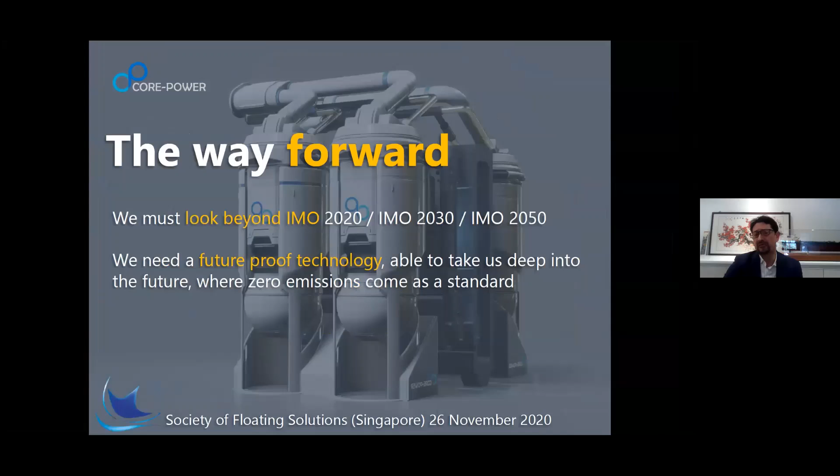Now, the way forward, and not only for shipping, is just to look beyond pure compliance and find future-proof technology that is able to take us deep into the future. Like in shipping, we did a transition from sail to steam, from steam to diesel engines, and now it's time to find a new technology for the centuries to come. A technology where zero emissions or close to zero emissions come as a standard.

Now, in order to understand what technology is best, we need to understand also what is really sustainable. Sustainability is bound to three necessary conditions. In order to be sustainable, we need to be safe, both in standard operation and in accident conditions. We need to be affordable. If a solution is not affordable, we cannot implement it, so it's not feasible. And also very important, a solution needs to be scaled to the size of the problem. Otherwise, it's not relevant to the problem.

The best solution in the world that can solve only a limited part of the problem is not a solution for the problem. And in shipping alone, the size of the challenge is around 350 million tons of heavy fuel oil equivalent that are used every year.

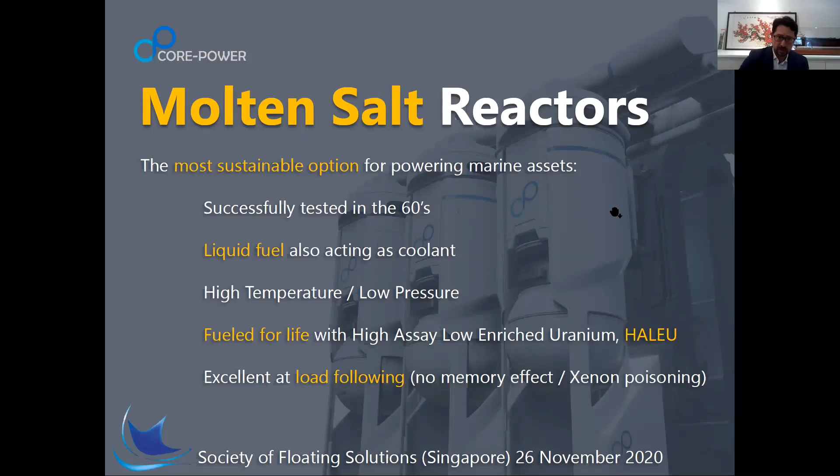Now, how is the scheme of a molten salt reactor power plant? We have a core with the reactor, and we have a drain tank. The drain tank is a passive safety feature, and in case of any issue, since the fuel is liquid, it can be automatically drained in the drain tank, killing the reactivity and killing criticality.

Then we have an intermediate loop that takes the heat from the reactor and transfers the heat to a power conversion system. In our case, the power conversion system is a supercritical CO2 closed cycle Brayton cycle. And then of course we have a cooling system, which is very important because when we operate a ship's diesel engine plant, most of the heat is rejected to the atmosphere through exhaust gases. In a closed system like this, we don't have exhaust, and in order to reject the heat, we need a much more powerful cooling system.

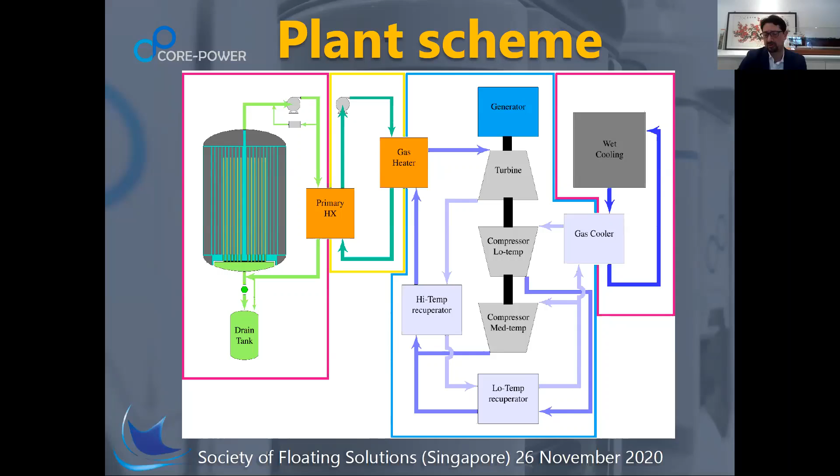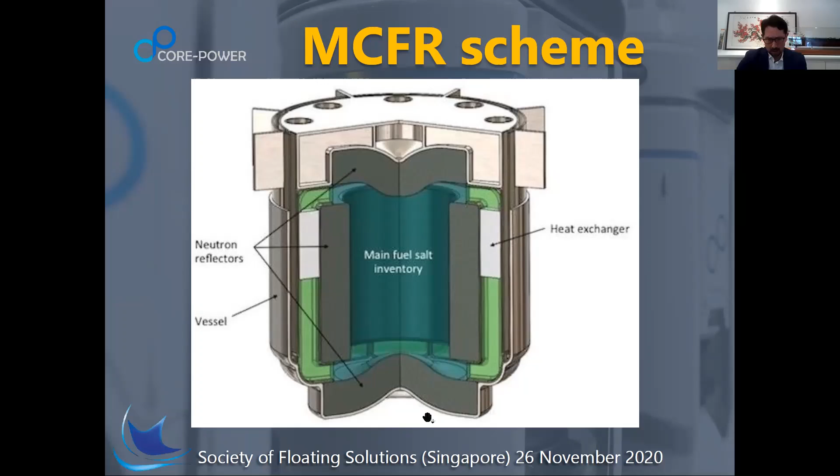If we look at the power conversion system, it's basically a closed cycle gas turbine operating on supercritical CO2. That means CO2 at a pressure above about 74 bars and with a temperature above 31 degrees. In these conditions, CO2 behaves like a liquid when I compress it, and it behaves like a gas when I expand it. So I have very good expansion work that I can extract from the turbine, and very little compression work required in the compressor.

So in order to maximize the efficiency of the cycle, we have two recuperators. We recuperate the heat of the flow that comes out of the turbine, and we exchange the heat with the cold gases before they enter the heat exchanger. And then we have another recuperator, a low temperature recuperator, that is used for a similar purpose. That means that we reject heat at very low temperature, below 70 or 60 degrees, down to about 27 degrees. Since we reject heat at such a low temperature, we no longer need an additional waste heat recovery system, and we can maximize the efficiency of the plant.

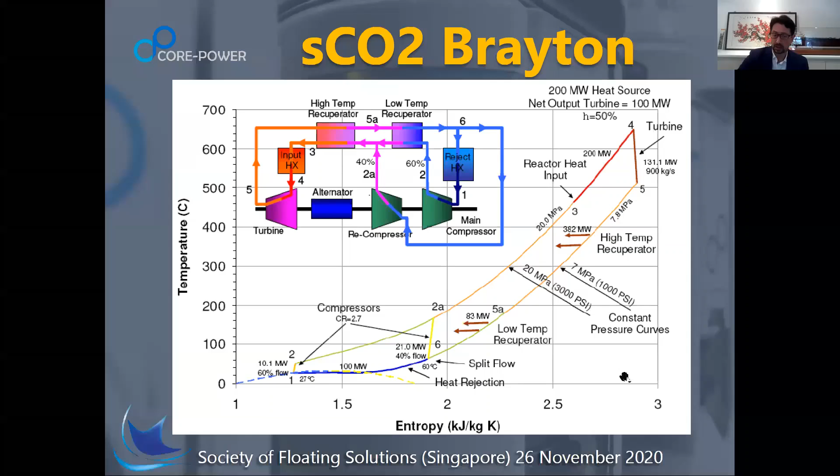So if we compare molten salt reactors and pressurized water reactors, the biggest differences are the following. First of all, as we said, the fuel is liquid instead of being solid. That allows passive walkaway safety, which is very important, especially if we want to deploy this type of reactor in commercial shipping and maritime structures. And the fuel also acts as a coolant. So if I lose the coolant, I also lose the fuel. That means that I lose criticality.

In addition, the fact that the fuel is liquid instead of solid means that I can easily reprocess the fuel. This means that for the same amount of energy, I have much less spent fuel, about 95% less spent fuel with respect to pressurized water reactors, where spent fuel is basically not reprocessed because uranium costs very little, and reprocessing solid fuel is quite a feat.

Another big difference is that we operate at ambient pressure instead of high pressure. So basically, it's like comparing a pressure cooker with a saucepan. If you operate a pressure cooker and you have an overpressure, it might explode and you might have parts flying around. So if we have an explosion of a pressurized water reactor, like happened in Chernobyl or Fukushima, which were not nuclear explosions, we still have a large contaminated area. Instead, an MSR is like using a saucepan. If I have a problem, I have a leakage.

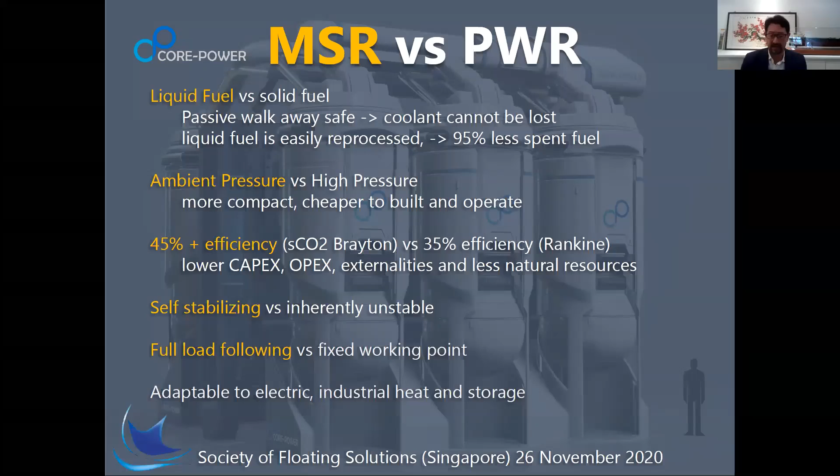Also, molten salt reactors are self-stabilizing, while pressurized water reactors are basically inherently unstable. In addition, molten salt reactors are very good at load following, while pressurized water reactors basically prefer working at a fixed working point, generating base load. So we can have a compact machine, cheaper, that can be adapted to electric propulsion, electric generator, create industrial heat, and also operate as energy storage, thanks to the molten salt.

And we can see that in principle, moving to LNG allows a reduction in operating cost and a reduction in externalities, both health, safety, and environmental externality and climate change externality, and a slight increase in capital cost. However, LNG is still not compatible with IMO 2050 goals. So we need to transition to green fuels.

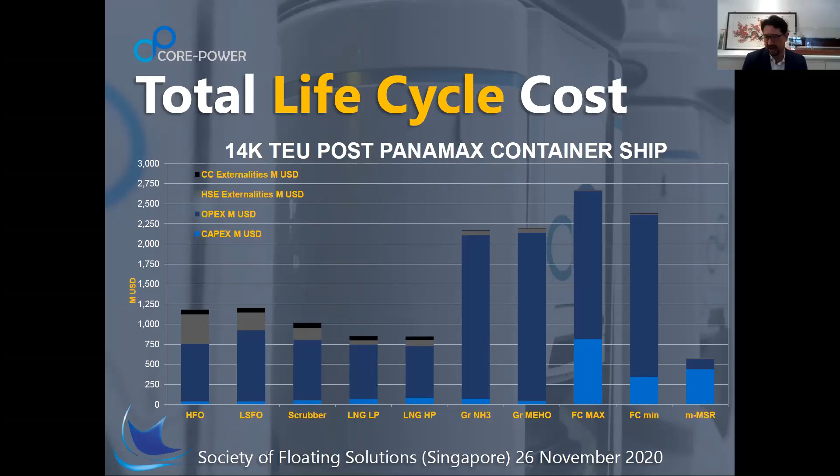So as we have seen, molten salt reactors for large ships guarantee superior economics. They guarantee the lowest private cost. They guarantee the lowest externalities. That means the lowest total life cycle cost, without pushing emission from ship to shore and without needing large infrastructures, because once I install on the ship a reactor that is fueled for life, I only need to decommission the reactor at the decommissioning of the ship. There will no longer be the need to provide tons and tons of fuel produced and shipped around the world.

Of course, we have the issue of the CapEx, because shipping in particular is used to a low CapEx, high OpEx scenario, while this is the opposite. And this can be solved through leasing. So basically, the manufacturer of the reactor will lease the reactor to the ship owner through a power purchase agreement. The manufacturer will still be the licensed operator of the reactor, and he will be responsible for the through life maintenance, the crewing of the reactor, and also the decommissioning of the reactor. Because it's very unlikely that ship owners or other operators want to become licensed nuclear operators.

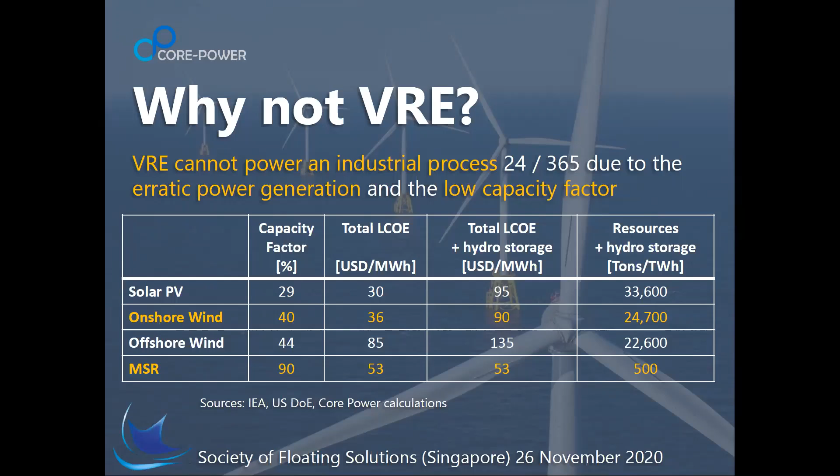So we all would like to have free, cheap, let's say clean and green power, but sometimes physics gets in the way. Now let's apply the above to Singapore. We know that Singapore is one of the most important bunkering ports in the world. In 2018, about 50 million tons of bunker were sold in Singapore.

And due to the, let's say, lower energy density of zero carbon fuels, these 50 million tons of fossil fuel are equivalent to about 100 million tons of zero carbon fuels, like green ammonia or green methanol. Let's suppose that in the future, 30% of this quota will be zero carbon. That means that we need to produce and sell in Singapore about 30 million tons of zero carbon fuel per year. It's a large quantity.

Now, the energy that is required to produce 1 ton of zero carbon fuel is about 10 megawatt hours. That means that the energy that we need to create 30 million tons is 300 terawatt hours, which is equivalent to 34 gigawatt of new clean power capacity, rated power capacity.

Now, let us compare it to the existing power generation in Singapore, which is black because it's basically based on LNG. We have in Singapore now about 14 gigawatt of installed power capacity. So we need to add 2.5 times the existing one. Okay, so it's not easy.